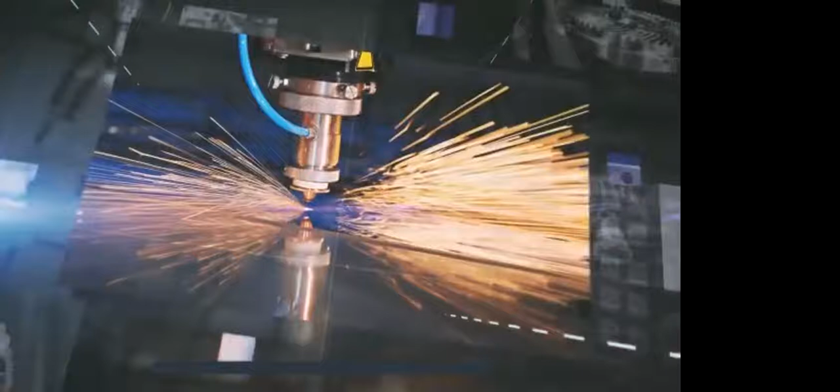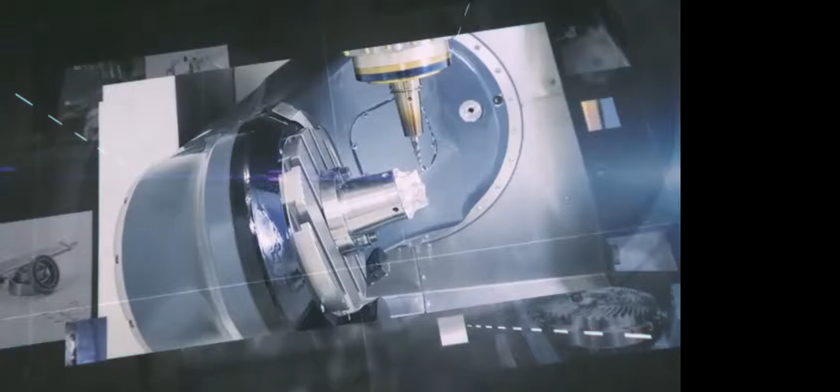...and innovation-led machine tool technologies. With over 500 member companies today, IMTMA members encompass over 90% of the organized machine tools and accessories business in India. IMTMA has been creating a vibrant, interactive space for shared innovations in the industry through support to its member companies, organizing mega events and flagship trade exhibitions at its advanced BIEC exhibition premises, and contributing to government regulations. IMTMA has also become a center of excellence for focused application-based training.

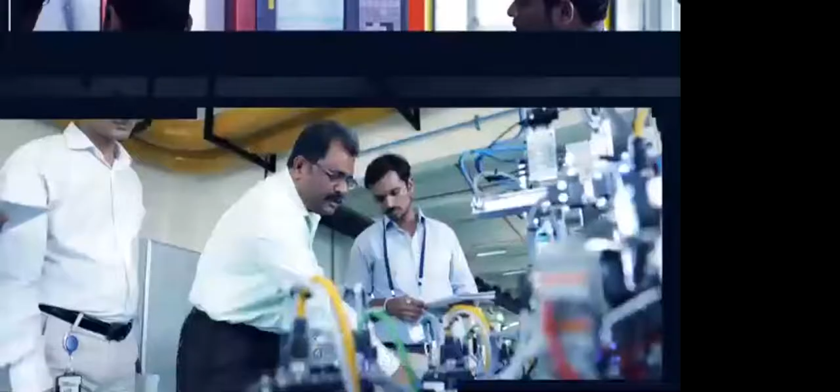Training and skill development at IMTMA. The IMTMA Training Advantage: IMTMA courses are differentiated by the comprehensive hands-on experience students receive on the latest machines currently in use in leading organizations across the world. The finishing school, the automation course, and the design course are supported by practical training on CNC machines and other equipment, giving students a direct edge over average theory-based engineering applicants. Engineering students gain confidence in their skills and prospective roles, and gain campus advantage to the powerful member organizations that are part of the IMTMA network.

Short-term workshops for industry professionals. We conduct many short-term programs at IMTMA for working professionals. We organize workshops on more than 80 technical topics covering various functions of manufacturing industries, including R&D, production, planning, quality, and maintenance. Each program is delivered by subject matter experts with more than 30 years of experience in their particular domains. Classroom sessions are supported by practicals, demonstrations, and industry visits in order to make the learning complete.

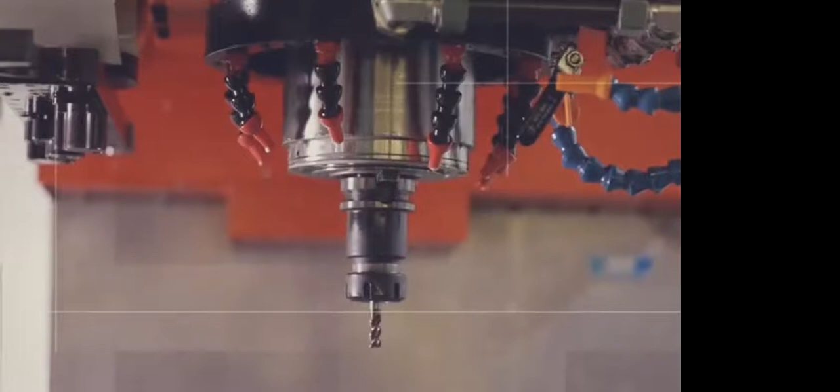Trade exhibitions at IMTMA. The IMTMA exhibitions and trade shows have been fertile ground for B2B and B2C business networking, providing the ideal showcase for members to demonstrate to the international machining industry. IMTMA has taken great strides in its vision for a unified, progressive machine tool industry in India, and continues to provide next-generation training and skill development to young engineering minds who will go on to reshape the Indian industrial landscape as we know it.

So participants, this was a short video which explained to you the IMTMA activities. Now I would invite Ramesh sir.

Yes, just a minute, let me share my website... let me share my PPT. Just a minute. Okay, just give me a moment, I'm setting it up. Maybe you'll have to just a minute... maybe you'll have to set it up yourself, Dhananjay. Just a minute. I think you'll have to set it up yourself, Dhananjay. Please bear with me, not able to... yeah, share. Fine, sir, yeah.

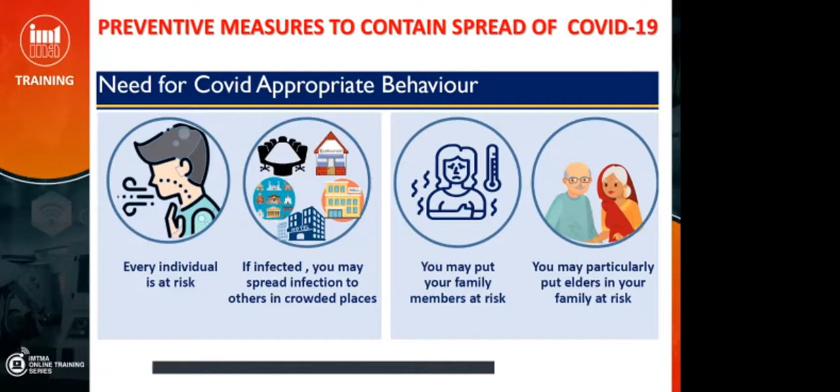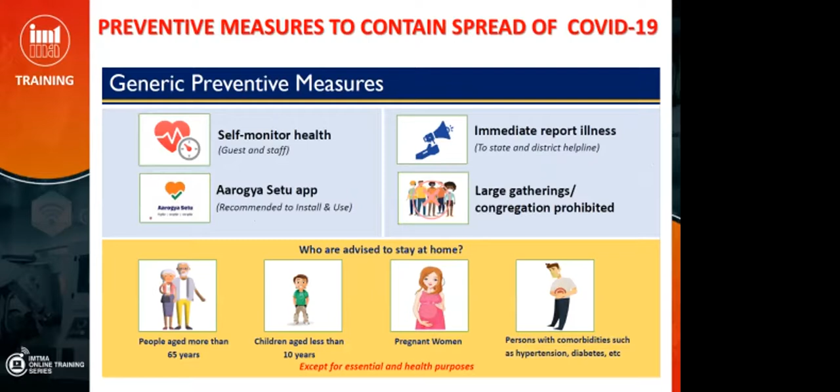We'll briefly explain to you about IMTMA. As you have seen in the video, IMTMA is mainly into training, exhibitions, and mega events. Imtex is one of our well-known brands; it is Asia's largest machine tool exhibition, held every year in Bangalore.

About IMTMA training, we offer 200 plus training programs. We have imparted training for more than 32,000 professionals from more than 4,500 companies, and man-days 126,000. These are snapshots of our technology centers from Bangalore and Pune, where we provide state-of-the-art technical inputs to machine tool builders and users. We have Industry 4 ready labs, and an automation lab with robots.

We conduct short-term programs and long-term programs. Short-term programs are mainly for professionals, and long-term programs are for practicing engineers and fresh engineers. These are career-oriented programs. Another vertical we have is e-learning, which I will explain in further slides. Our classroom training is a blend of theory and hands-on training, and wherever necessary, we organize industry visits.

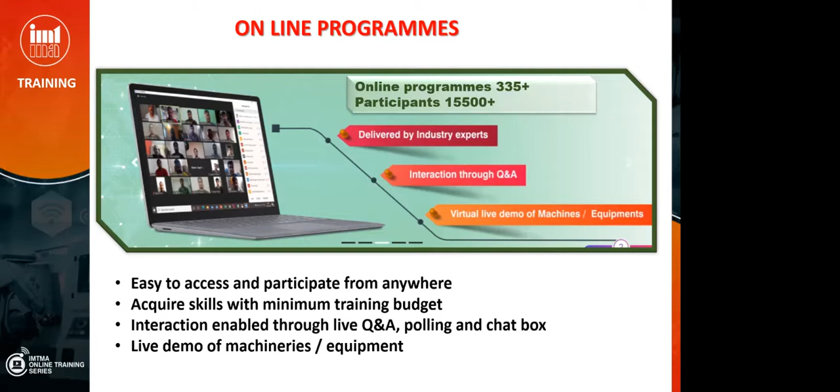About the online training programs, we have conducted more than 300 online training programs, and more than 15,000 people have participated. These are quite budget-friendly training programs, enabled with question and answers, pollings, and a chat box to make them more interactive.

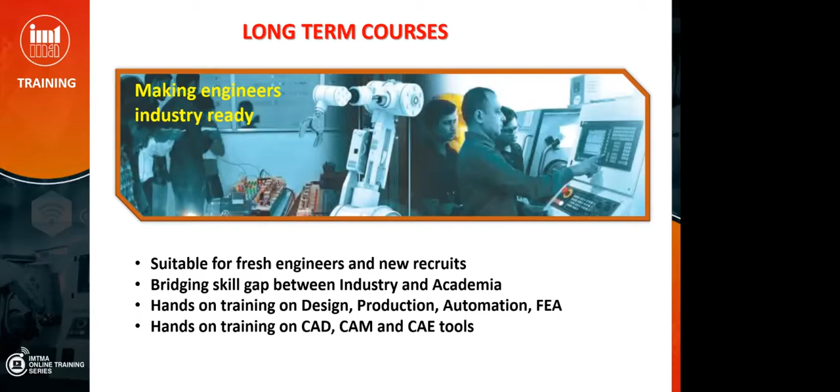Long-term training programs, as I said, are mainly for fresh engineers and practicing engineers; these are career-oriented programs. Our main websites are imtmaelearn.in and imtmatraining.com. On both these websites, you can explore training programs of your interest, and if you want to know more about IMTMA, you can visit imtma.in. So this was all about IMTMA. I'll stop sharing now.

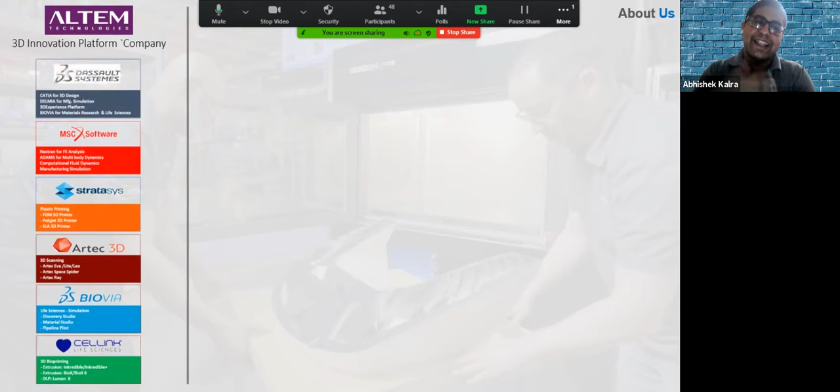Before we go further, a little bit about ourselves. Altem Technologies started in 2011, and we are in the 10th year of our operation. Essentially we call ourselves a 3D innovation platform solutions provider. That means we want to and are capable of addressing every problem of any company or organization trying to create a successful product which will eventually be manufactured. We enable companies to go from idea to reality, from art to part, as I like to call it.

In that pursuit, we have partnered with some of the top global solution providers in the world, starting from Dassault Systemes, which most of you know for their CAD platforms, the most popular being Catia. We also have simulation and analysis solutions. Once a product is designed, before you get into manufacturing, you need to make sure it runs under all possible conditions the part will be susceptible to. For example, a car has to run on smooth roads, dirty roads, off roads, in day and night, under normal and heavy weather, and so forth. So simulation and analysis solutions help you predict the behavior of your component under various conditions.

Then we come to the heart of our business solution, which is rapid prototyping and 3D digitization. Most of today's presentation will be based on that. We also have solutions in life sciences, with the same story of idea to product for life sciencing and drug discovery, but that's a topic for another day.

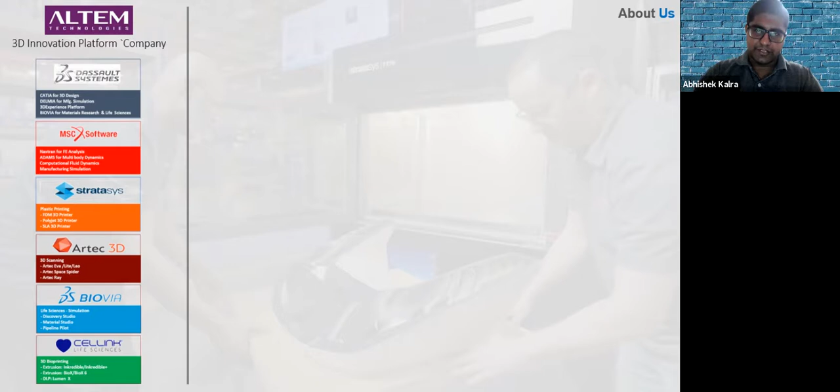As we said, we started in 2011, and today, after 10 years, we have been conferred with a lot of different awards, starting with being in the top 100 MSME companies of India. We've been awarded the most innovative 3D printing company of India by Frost and Sullivan, and we have one of the largest and happiest install bases among all Stratasys partners across the world. That's something we are very proud of, that our customers are very happy with our support. We have more than 400 customers in different areas, ranging from automotive to aerospace, consumer products, healthcare companies, packaging companies, and so on and so forth.

The good thing about 3D printing is that it is a solution that impacts everybody and anybody, whether you are a plastic bottle manufacturer, a four-wheeler manufacturer, a two-wheeler manufacturer, or Airbus that makes planes, or ISRO that makes satellites. It impacts everybody because it's becoming more and more critical for everyone to improve their products and reduce the time and cost in which these products are made.

Now let's look at some of the issues that manufacturing driven industries face. I'm assuming that most of you are from the manufacturing industry, so this will be highly relatable to you.

First thing is customer expectations have become very, very high. We are customers ourselves, and we want the best products, not just functionally, but also aesthetically. When you go buy a car, you look at the function, how big is the engine, what is the mileage, all of that. But you are also equally interested in the appeal of the car.

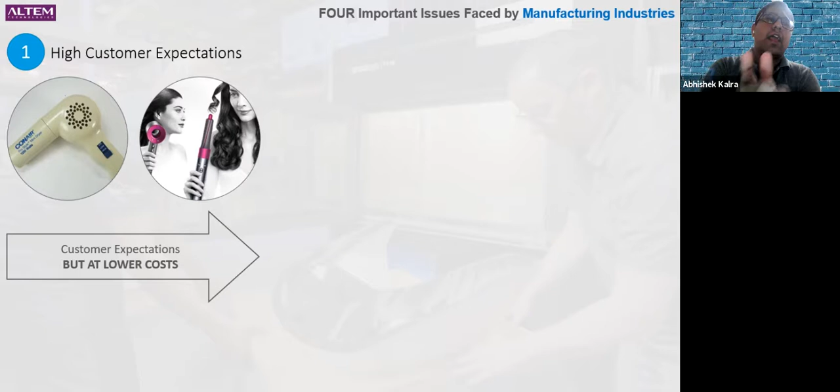Nobody wants to buy a Fiat today. People want to buy a Mercedes today. If I say that a Fiat car, let's not go to Mercedes, but let's say a Maruti Baleno, have the same functional performance, you will never still go and buy a Fiat. You'll still go and buy a Maruti Baleno. Even if the functional performance of the Fiat is a little bit higher, you'll still go ahead and buy a Baleno, even if it's a little higher in price.

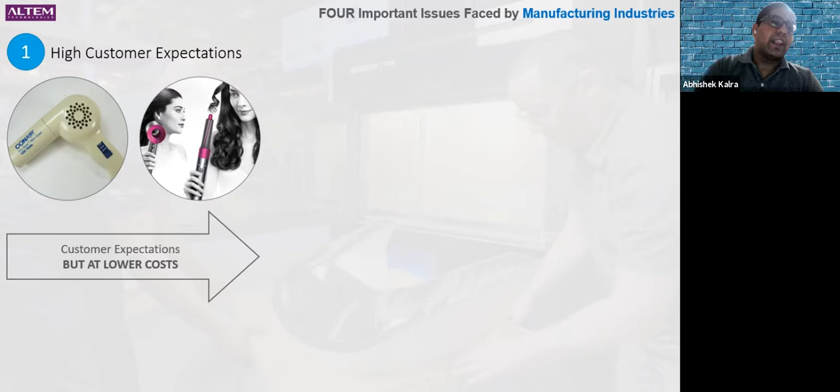But while customers want better products, they simultaneously want them at a lower cost. And competition will always be able to deliver products at a lower cost unless you are the fastest, most efficient, and the cheapest. This is perhaps an image that all of you would have seen.

This is an example from the smartphone industry, but it's applicable to anybody and everybody, whether it be consumer electronics, automotive, or special purpose machinery. Competition is so tight that the average time companies have to launch their product is reducing drastically. 3, 4, 5, 7 years ago, it used to take a car company easily 1.5 to 2 years to launch a new model.

Now we have come into a scenario, and even the pandemic has not slowed it down, where automotive companies are launching 2, 3, 4 products every year. And then immediately another car company will launch another product. So in order to be able to sell more, your product has to be the best product available in the market at the best cost that is the worth of that product.

And it has to be most exciting for the customer. The third problem is cost pressure. People want better products, you have a larger competition to deal with, people want better products at a lower cost. You have to innovate faster, but there's always a consistent cost pressure that I need to do all of my development at the lowest possible cost.

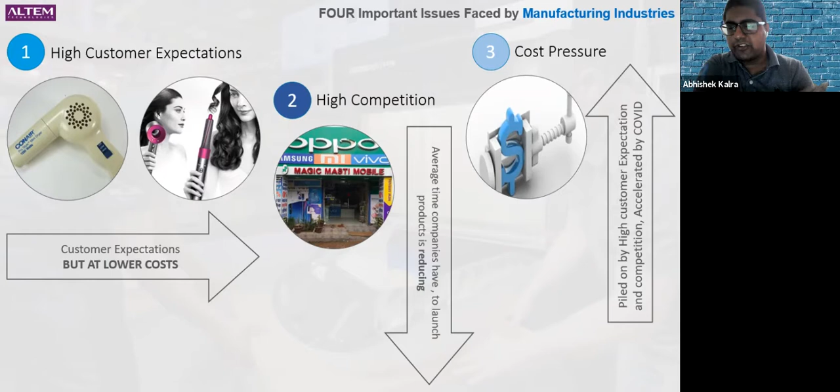Then confidentiality becomes a very important thing here. There are several companies, General Motors, to give one example, who've had to almost scrap the entire product because of data breaches. Now, because you are faced with such high competition and cost pressure, what we tend to do is not invest in technologies in-house and start to outsource work.

Some places it works, I'm not saying outsourcing is bad, but often that outsourcing is driven by a risk of your data and your project going to the same vendor as your competition's vendor. I have an interesting anecdote to share with you from a few days back.

One of my customers required a very, very large part for a new automotive product development, and they outsourced it to a services company, not based in India, at least I can say that proudly. Of course, all NDAs were signed and all confidentiality agreements were in place. But then 2 days later, the image of that product, a styling component for a four-wheeler car, was being published on LinkedIn.

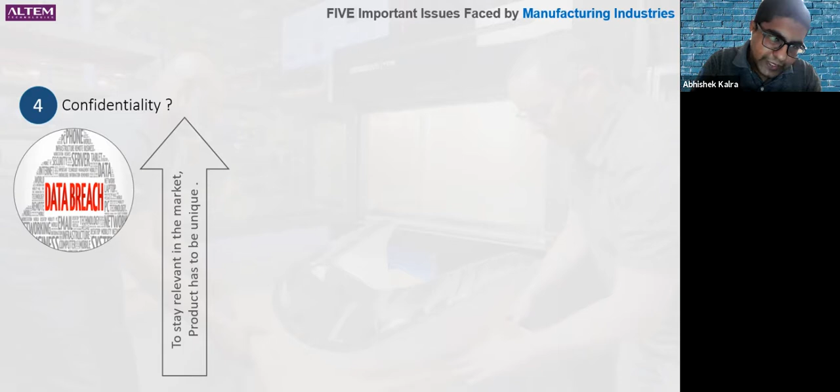And so despite non-disclosures, data does get leaked, and it's very relevant, very important that your product is unique. So if confidentiality is not guaranteed and your data is getting leaked left, right, and center, there is no way that you can be unique.

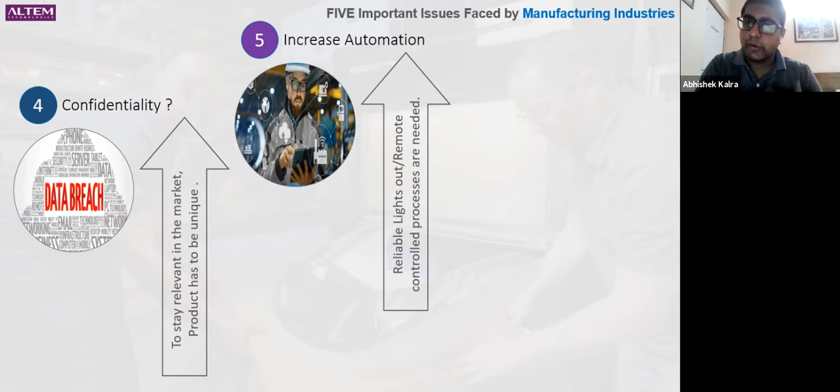The fifth problem, or window of opportunity, is that we need to increase automation—reliable lights-out, if not completely lights-out, at least remote-controlled manufacturing processes. COVID has taught us a big lesson: anytime anything could happen, people could fall sick, factories would need to be shut down, labor needs to be removed, governments could put lockdowns, but manufacturing still needs to be done. I think we are far away from complete automation, but tools like 3D printing and other Industry 4.0 tools, which even Ramesh and Dhananjay were mentioning in their presentation, are really important for every manufacturing-driven organization to adopt if we want to consolidate and create the best product at the best price.

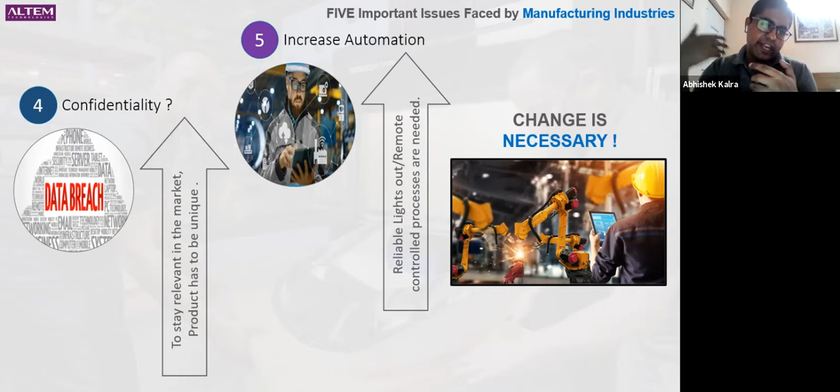The most important thing is change is necessary. It's no longer an option, no longer a luxury—it is necessary. We need to evolve. Manufacturing industries are under constant pressure to improve and change to create the best possible product. These criticalities lead to a force that requires you to invest in advanced technologies, which might cost you some money to start with, but will definitely give you the solution to all of these problems, if not in the short run, at least in the medium to long run.

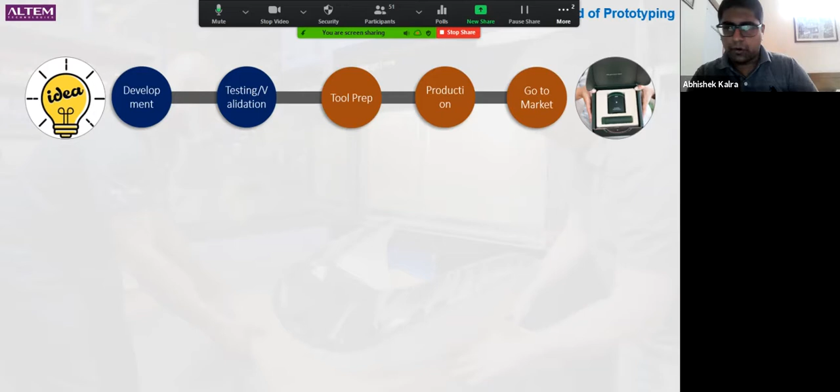Let's look at how that's going to happen. Now, all of you, I'm assuming, are product development people. For those of you on the call who are not, this is how product development works. Let's say I want to create a bottle of perfume, or an air conditioner. It starts with an idea. Then you get into development, where you design the product and design the systems that go around the product.

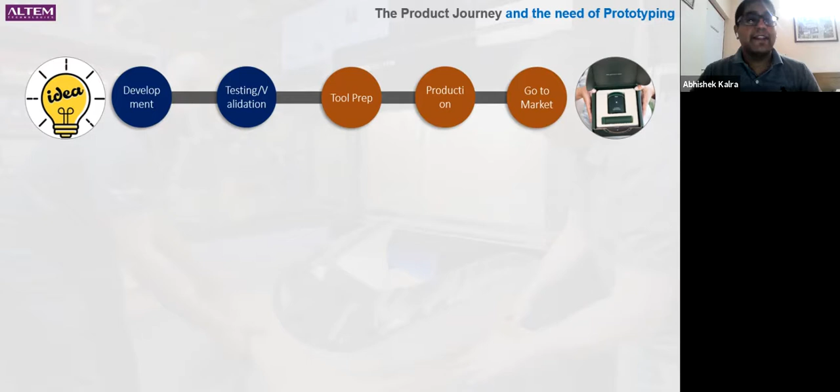Let me give you a very simple example. I have this plastic bottle in my hand. It has two components, the bottle itself and the cap. My development stage would be where I design the bottle in a three-dimensional drawing software, and then choose the material, choose the color, those kind of things. And then I need to test and validate my design, which typically happens with either prototyping solutions or simulation solutions.

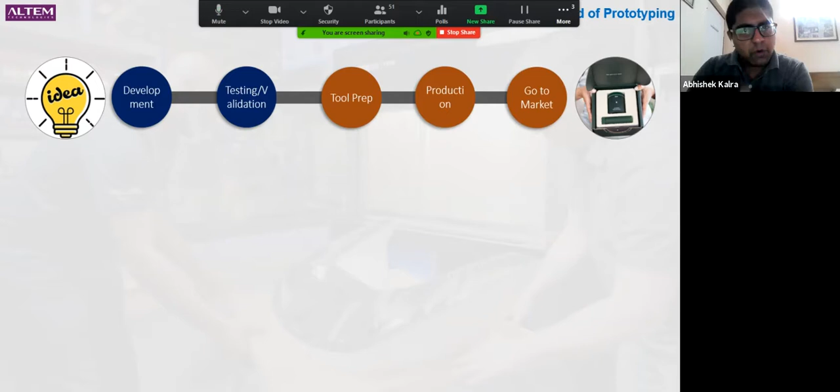Once you've crossed this path and stepped forward towards manufacturing, your fate is sealed. The moment tool preparation and pre-production starts—and you guys are machining people, so none of you are better judges of this—there aren't really any major changes you can make to the concept of the product itself. You can, but then you'll have to go back and waste time and waste money.

Now here is where you have scope for product improvement. This is the place where you can improve your product until you get the best possible version. But the challenge is that if we keep doing iterations, and if the cost and lead time of iterations is so high, then somewhere we have to put our foot down and say no, this is the best I can do, and leave the rest to my best sense of judgment, or to fate. Of course, you also have scope for improvement from a per product cost reduction point in the manufacturing cycle as well, but that does not improve the quality of your product.

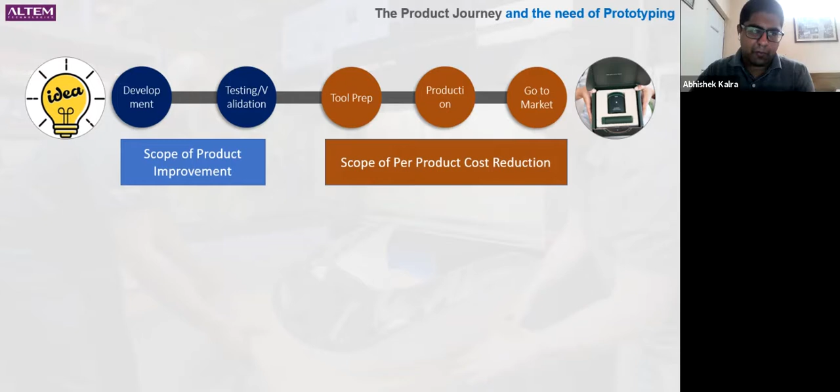So when I say scope of product improvement, I have one simple funda: fail fast, succeed fast. You fail fast, only then can you succeed fast. So if on the second day of coming up with an idea, I know there are errors—for example, the cap doesn't fit the bottle properly—I can immediately correct it and move faster towards my production and tool preparation. The second version of fail fast, succeed fast is to achieve the best possible version of your product.

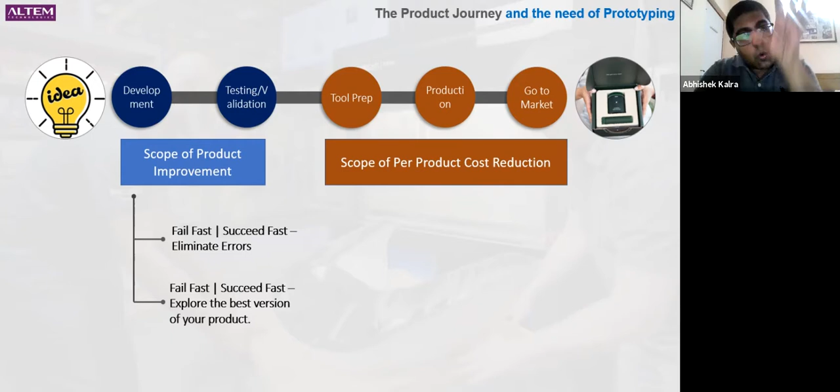But this is only possible—doing all the possible iterations and exploring all possible creativities—when there is a fast and cheap method to develop, test, and validate your product.

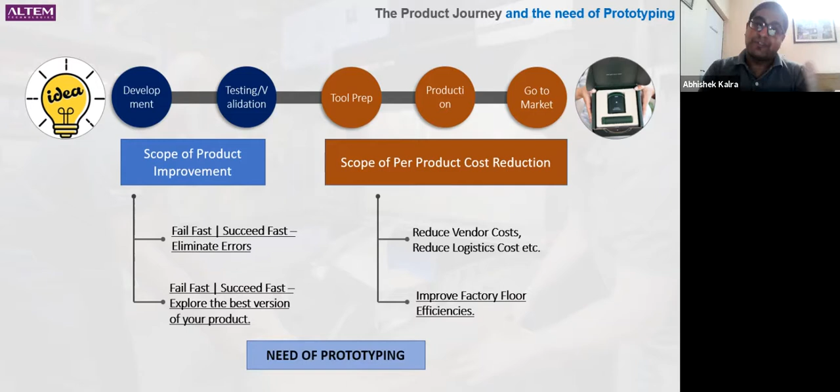And then, of course, with respect to manufacturing, you have to reduce vendor costs, reduce logistics costs, set up rate contracts, so on and so forth. But you also need to improve factory floor efficiencies. How fast are products rolling out of my factory? How efficient is my labor? These three places are places where 3D printing and prototyping can fit perfectly and give you incrementally faster results.

Let's look at how. Now, 3D printing is not new. It has been around for at least the past 35 years. Today, I don't think there is anybody in the country, or in the world, who is not using 3D printing in one way or the other. Whether you are a small bottle and cap manufacturer or an airplane manufacturer, everybody is using some sort of 3D printing in some way, whether they have in-house machines or they outsource it to vendors, or at least if they don't do 3D printing, they would do some sort of rapid prototyping with machining and soft tooling, etc., which are somehow also linked to the same idea that I'm trying to present.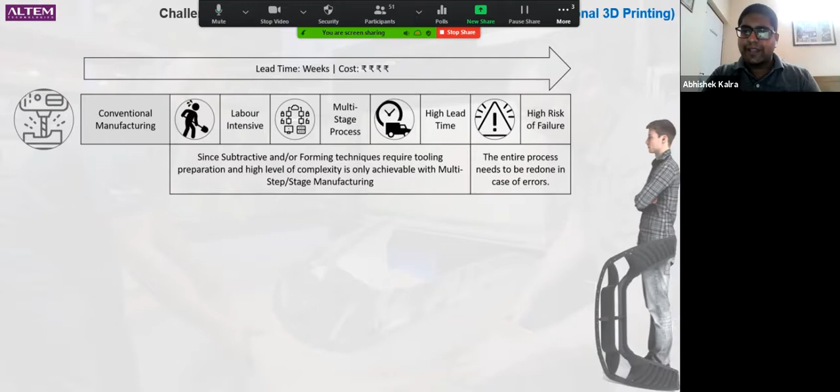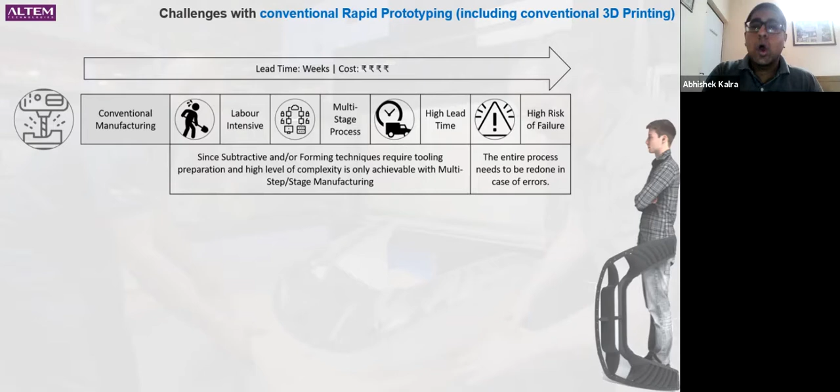Now, the traditional way of prototyping is conventional manufacturing, a combination of machining and tooling. I don't need to tell you how complex it is to create especially complex prototypes like the one you see on the screen with machining and molding. It's labor intensive, it's a multi-stage process. You might require multiple machining cycles, multiple tools. That obviously gets associated with high lead time. Costs are very high, lead time can go into weeks. And if something goes wrong, even if your design is out by a millimeter, either you throw money to repair your tool or you throw money to start all over. Long story short, you spend a lot of time, you spend a lot of money.

This kind of gets solved with 3D printing, but the challenge is that traditionally 3D printing has been very unaffordable. Well, of course, you have smaller printers which cost as low as 5 lakh rupees, 6 lakh rupees, some even cheaper, but they are very low quality, so we're not going to talk about those. But if you talk about big parts, larger parts, complete fenders of cars, complete panels of washing machines, complete cooktops of gas stoves, white goods, HVACs, so on and so forth, for every company to be able to invest in such large format 3D printers is impossible, because traditionally that type of machine has gone into crores and crores of cost.

So what people do is they tend to go outsourcing. There are some very good service bureaus set up in the country. We are obviously one of them, where you give your design and they give you your part back, and they typically take a week to 10 days depending upon how big the part is.

Now there are several challenges. Again, you need to be cost competitive. So what's going to happen is that your engineers or your product heads are going to call 4 or 5 vendors, send the files to 4 or 5 different people. If you have non-confidentiality with those 4 or 5 people, good enough. If not, then you have to sign confidentiality agreements. It's a very tedious process. Then there is no control. If my machine as a service bureau fails, then your product development as an end customer has stopped, and there's nothing that you can do about it. Of course, the lead time is higher, and most importantly, confidentiality is at risk.

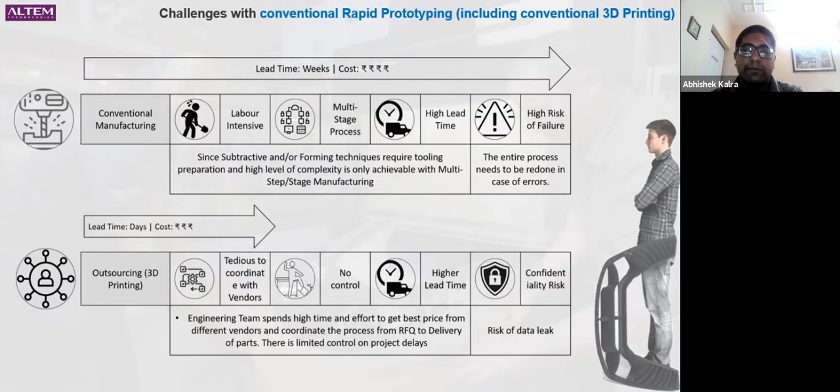I told you, one of my customers got a part done from a fairly popular, in fact globally listed, service bureau under a confidentiality agreement, and they shared their part image on LinkedIn the next day. This is very simple. I have seen scenarios where I have seen images of other customers' parts on service bureaus' websites, and it could be an honest mistake, but it does happen. And in fact, even then, because those service bureaus have to amortize the cost of the heavy equipment that they have bought, they'll charge you at least 2x to 3x of time. So your lead time is still high, lower than conventional manufacturing of course, because 3D printing is faster and cheaper, but because you're paying for somebody else's time and somebody else's money, you still end up paying 2 to 3 times what it would cost idealistically.

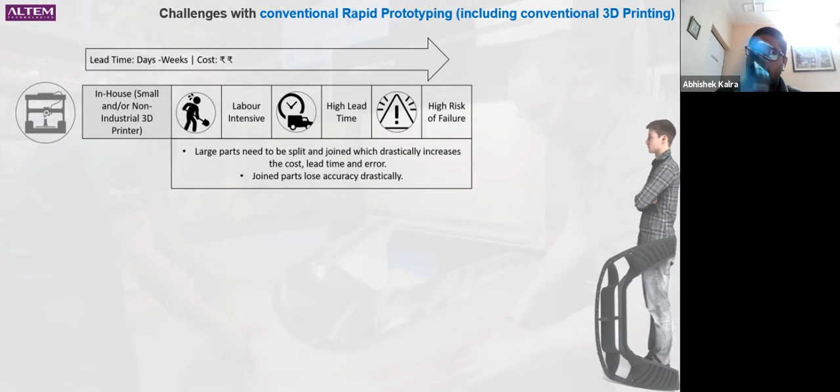The next thing which people do, which I would call a brutal mistake, is to try and use non-reliable in-house 3D printing. Now, 3D printing is such a heavily talked about topic that people feel a 5 lakh rupee 3D printer and a 1 crore rupee 3D printer and a 10 lakh rupee 3D printer are the same. And what happens is that people buy machines without properly evaluating what their requirements are. I have seen customers who produce 3 meter parts buy a 300 by 300 mm machine, and they're splitting the part and joining it together.

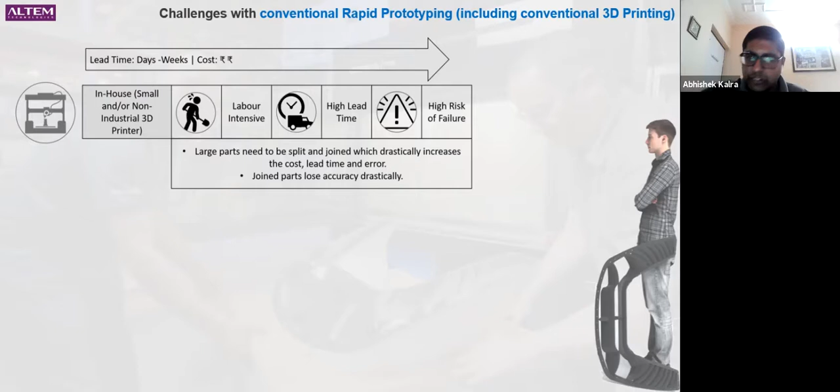Parts fail, there are reliability issues. When you assemble the whole thing together, the deviations of accuracies of 10 different parts that you're trying to join together have added up, and the overall assembly that you get after 2 or 3 weeks of hard effort is not usable because the part is inaccurate.

So this is a complete no-no. So what is the solution then? The solution is to have a large format industrial 3D printer, which gives you exceptional part quality. When I say part quality, I don't just mean a fancy looking surface finish, but 100% accurate geometry realization of whatever you'd like to feed into it, whether it be a simple cube or a complex air hood vent like this, or any geometry you can design.

Because when you design products, you don't design it according to 3D printing, you design it according to your final mass manufacturing method. So your prototype has to copy or mimic that. These systems are typically plug and play, laborless, generally reliable and error free. And even if you fail, you start a job today and it's a 30-hour job, at the end of 30 hours you know whether your idea or design is correct or not, and you can iterate faster. As I say, fail fast, succeed fast.

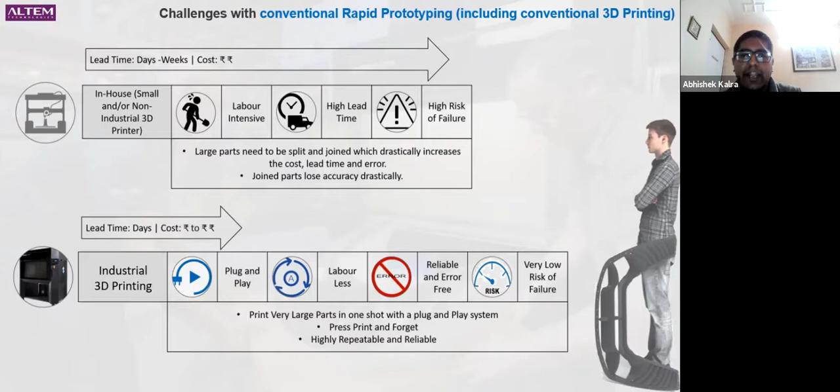But there's one problem. The challenge is cost. Conventionally, large 3D printers - and when I say large, I mean printers to the tune of 1 meter by 1 meter bed size, or half meter by half meter bed size - have been expensive.

There are cheaper systems available in the market, for crying out loud. The other day I got an email from somebody selling a 1 meter by 1 meter by 1 meter machine, claiming it to be industrial, for 5 lakh rupees. And I can guarantee you that you cannot even take out one single successful part from that 5 lakh rupee supposedly industrial machine.

So I'm not even going to talk about those - they're a sham. When I talk about proper, well-built industrial machines, whether from Stratasys, which I represent, or other companies, they get into crores. You have to pay very high capex. Operations are difficult because these are big industrial systems.

Now for cash-rich companies like the Boeings and Airbus of the world, and for governments like ISRO or HAL, this is okay - they can dedicate government funds to it. But for smaller companies, for companies with the cost pressure we spoke about earlier in the presentation, this is almost impossible. And then you get into the loop of compromise.

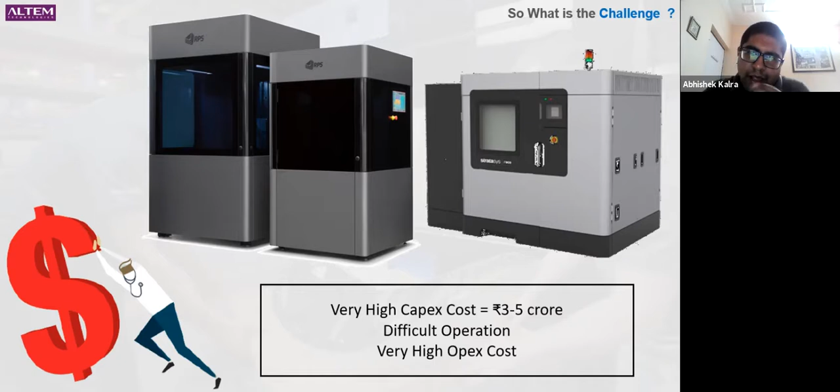So now, how do we solve this problem? This is the problem we as 3D printing vendors have been facing for the past 10 years - people want big parts, but the operating cost and capex cost is so high that people end up looking at alternatives, and things just fall apart. So how do we do it?

So we introduce to you a revolutionary product, based on the same industrial 3D printers we've been developing and selling for 30 years, at a much lower price point. I'm going to play a video - if somebody can just put it on the chat, let me know if you can hear the sound or not.

So are you able to hear the audio? Yeah, audible, sir.

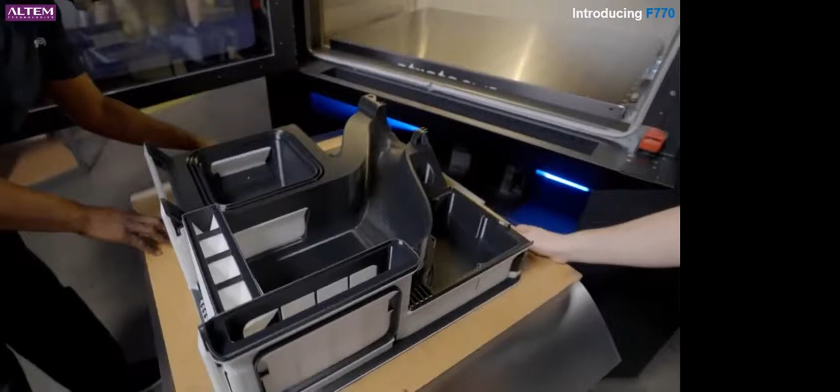The video gives you a bit of a hint on what is the scale of things I'm talking about. Long story short, we have developed an industrial 3D printer on the same DNA as our larger previous generation industrial 3D printers, but you get it at a price that does not break the bank.

Now, is it as cheap as a 5 lakh or 10 lakh rupee machine? No, it's still higher at cost. But if you're a company that does a lot of large size parts, and I'm sure you're currently struggling with a large cost of outsourcing or a large lead time of outsourcing, then this machine is for you.

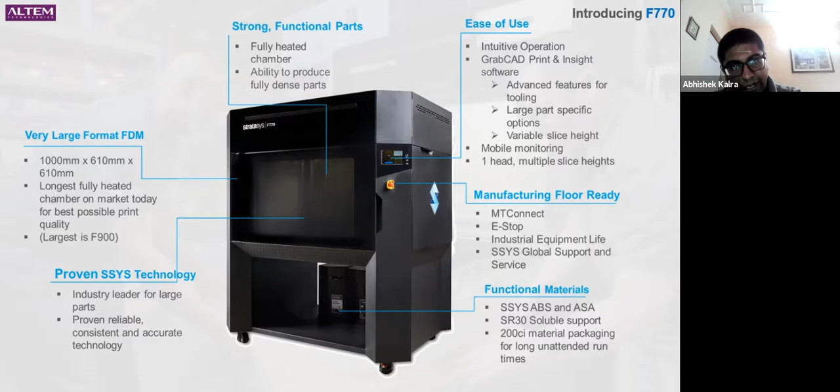Very rarely will you have a need to actually split your parts, which is where the trouble starts. As you saw in the video, you can produce very complex geometries: parts with internal channels, parts that are overall very large but have very thin features, parts where you require 100 micron or 50 micron accuracy over a 700 or 800 mm part, at a much faster lead time and significantly lower cost than any other equivalent quality alternative available.

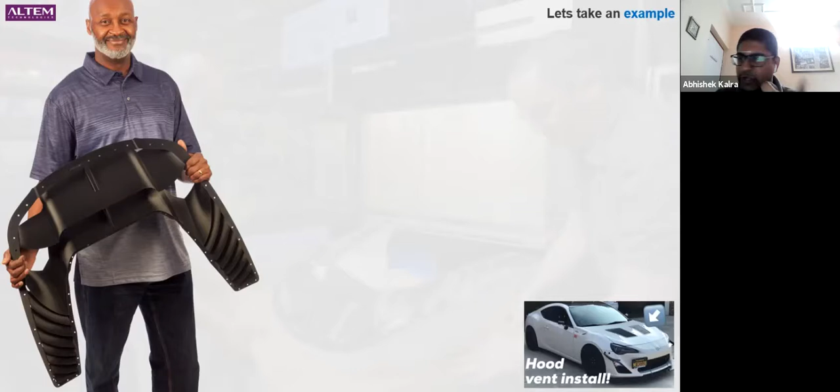Let's take an example. This part you see in the gentleman's hand is a hood vent for a vehicle. It gets installed from beneath the car, just under the hood or bonnet, and the fins come out, acting as an air release mechanism. So this is not just a form and fit prototype, but a part that will be susceptible to a lot of endurance testing and thermal loads because the engine releases heat.

It's a 783 mm part, almost 800 mm, but with very thin and complex curvatures. The fins that control the aerodynamics are less than 5 mm. All of this has to be produced at sub-100 micron accuracy while being susceptible to thermal loads.

We ran an analysis locally in India: if you have an in-house machine, it costs about 4 days and about 80,000 rupees. And that 80,000 rupees isn't just material cost - it's everything: labor, spare parts, accessories, power, internal time cost, all put together.

If we outsource to a service bureau, irrespective of technology, you'll have at least double the time and double the cost. Why? Because service bureaus, even if they can do the part at that price, charge you more since they have to amortize their machine - there's nothing wrong with that. And because such large sizes aren't possible with every technology, and people may not have multiple machines running, they often have to split your part and join them together.

If it's a simple form-fit part, splitting it into 2-3 sections may not matter, but this is a performance functional prototype - if you split the part, it's likely not going to be usable. In fact, when I was preparing this data, a lot of service bureaus refused to even quote for this part because it was too big and too complex for them to even try.

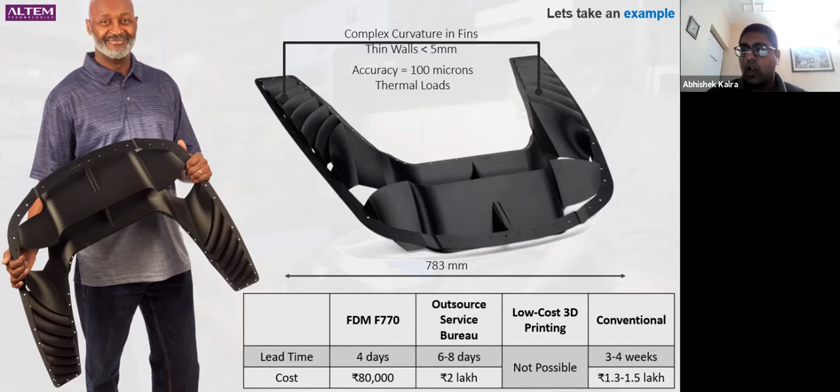If you need 3 or 4 iterations of this part and go any other route, you're delaying your product by at least a month. Remember, there's not just one prototype required for any product, whether a washing machine or an airplane - you need multiple parts, multiple prototypes. So every day and every rupee saved on product development by adopting in-house 3D printing adds up to much bigger savings and much faster product development.

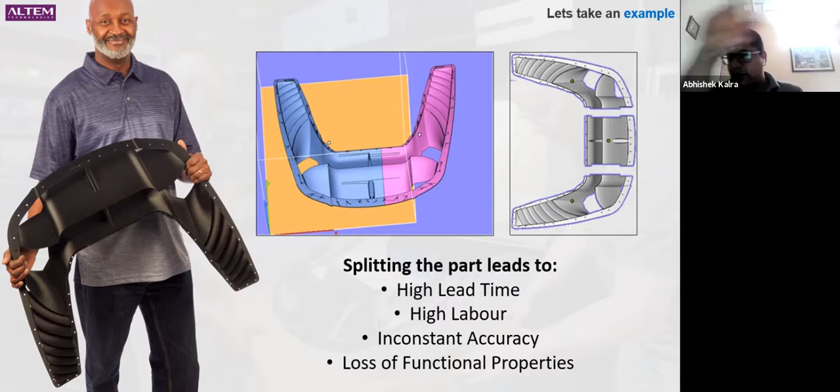This is what it would look like if any other conventional 3D printing technology had to do it - they'll have to split it into 3 parts, and then we're back to where we started: we won't get consistently accurate parts.

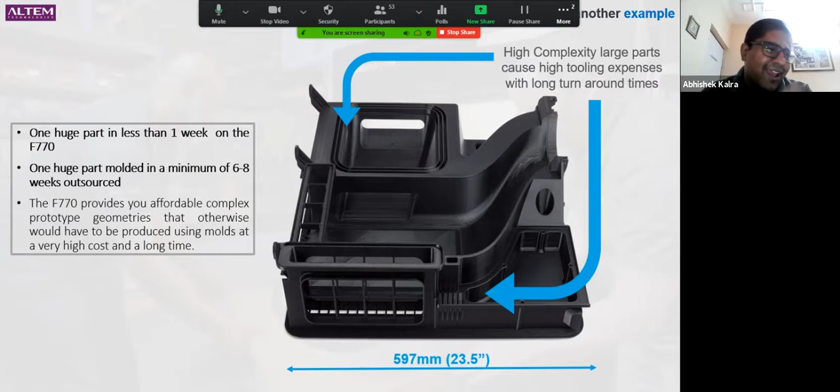You'll probably have to injection mold it or at least soft mold it, and that's going to take weeks. But with an in-house 3D printing setup, this is 4 or 5 days of printing, with similar cost dynamics. Despite being overall a larger part, it has very precise and fine features - 3.5 mm wall thickness, internal features, and ribs and clips hanging up.

Long story short, the fastest way to print, the fastest way to create this part is with 3D printing, and the fastest and cheapest way to 3D print this part is with in-house 3D printing. Another major benefit specific to fused deposition modeling 3D printing on this machine is that you can build parts that are hollow from inside, so you can save a lot of material if these are non-functional prototypes.

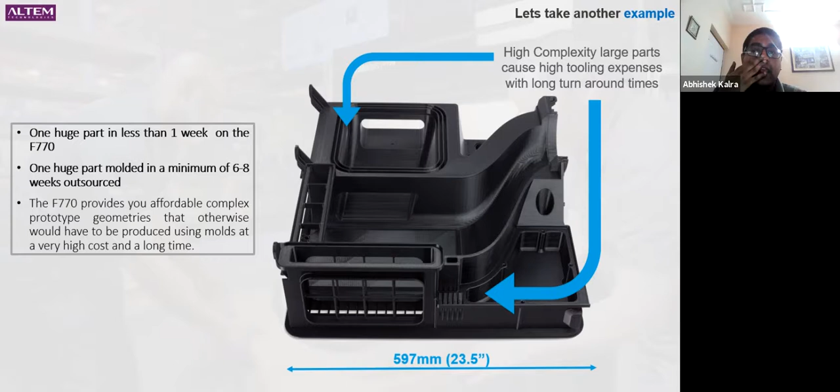Large parts could be everywhere, air conditioners, coolers, washing machines, kitchen equipment, suitcases, lawnmowers, bicycles, automotive fenders, doors. You imagine it, it's all around us. If you have a monitor, look at that. If you have a TV, look at that. If you have a washing machine, look at that. If you have big parts, 3D printing is the solution. If you have small parts, 3D printing is still the solution for you. But if you have big parts and do multiple projects a year, this is the solution for you.

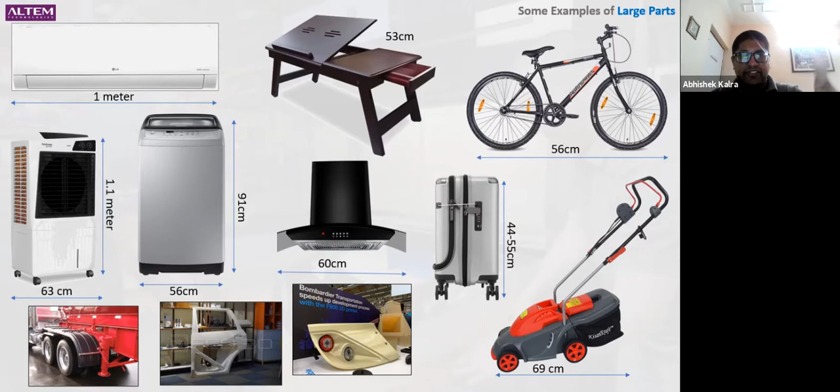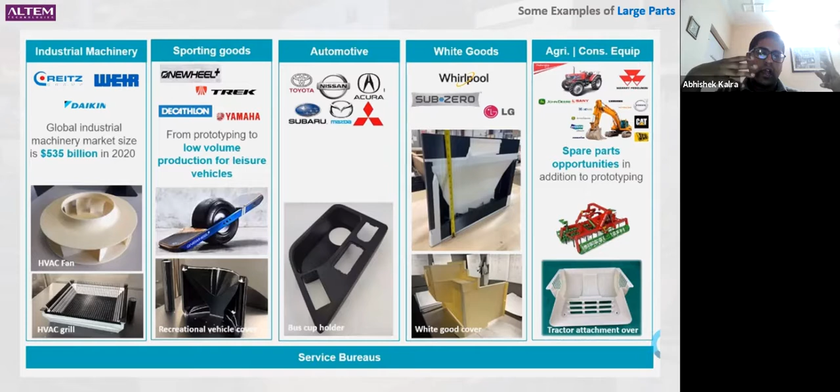Some companies and industries using our parts include industrial machinery and equipment, HVAC companies such as Weir and Daikin, sporting equipment such as Decathlon and Yamaha, automotive companies like Nissan, Toyota, and in India, Ashok Leyland, Maruti, white goods companies like Whirlpool, LG, Bajaj Electrical, Sub-Zero in India, and agricultural equipment companies like Caterpillar, John Deere. All of these companies are using this kind of 3D printing technology to significantly reduce product development lead time.

I'm going to show you one video, and then I'm going to show you a couple of Indian examples, and then we can move into some questions and answers.

Sub-Zero Group is a manufacturer of luxury appliances, Sub-Zero being the refrigeration appliance, Wolf being our cooking appliance, and Cove being our new dishwasher line.

The corporate development lab is basically a mini factory, a factory within a factory. We have seven 3D printers. I really enjoy 3D printing, it's my one love in our lab. I can still turn the light on in that compartment and watch those things run and think, man, it's amazing what these things do, and they are really important to us.

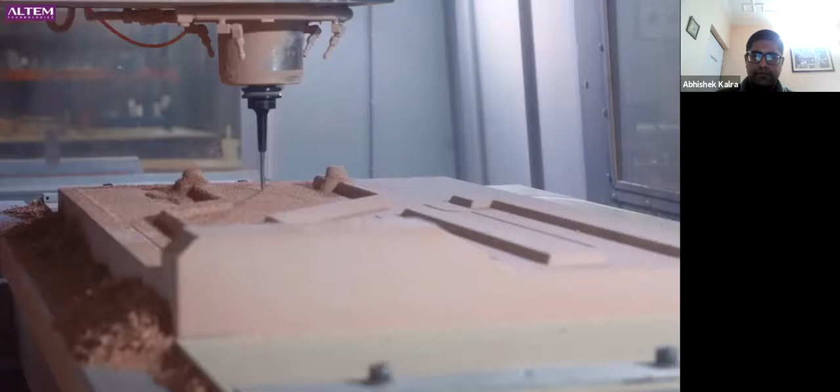If you open up a refrigerator, for instance, we make those parts within our lab. Basically, we try to duplicate as many of the technologies and applications that we have on our production floors right within our lab.

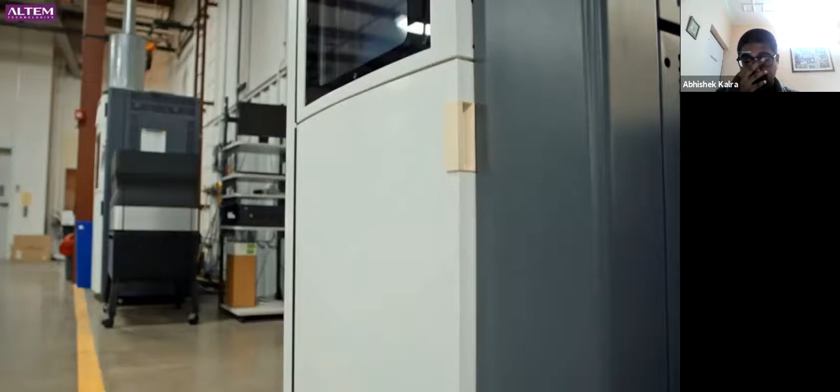I was excited about the F770 because of the build size. What we're starting to see is a lot of parts that are just starting to fall outside the build envelope of my Fortus 400s, and because of that my Fortus 900 gets overloaded, and we end up sending some of our bigger parts out to service bureaus. So when I heard about the build size of the F770 and the price point being talked about, I thought this could be a really nice addition to our lab. The size, 39 by 24 by 24, fits us very well.

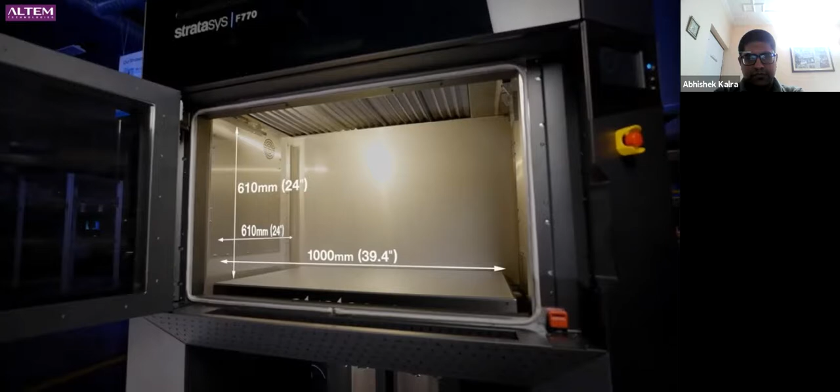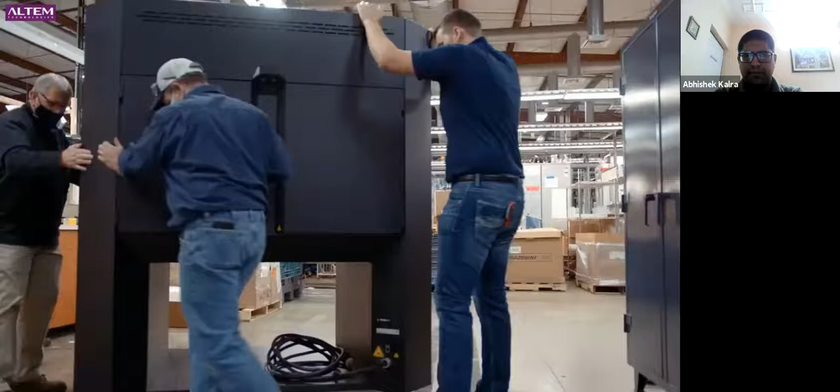Big is always good. You can make small parts in a big machine, but you cannot make big parts in a small machine. The biggest thing with having the 770 in the lab is that we're going to be able to keep bigger parts in-house, so it's going to eliminate a little bit more outsourcing. Probably 30 to 40% in savings for us to keep it in-house, which is huge.

When you've got product builds coming basically every six weeks, six weeks seems like a long time, but it's not when you've got a large number of component parts that you have to generate, and you've got to make sure everything is on site and ready to go when that start date is. So we can't miss a beat.

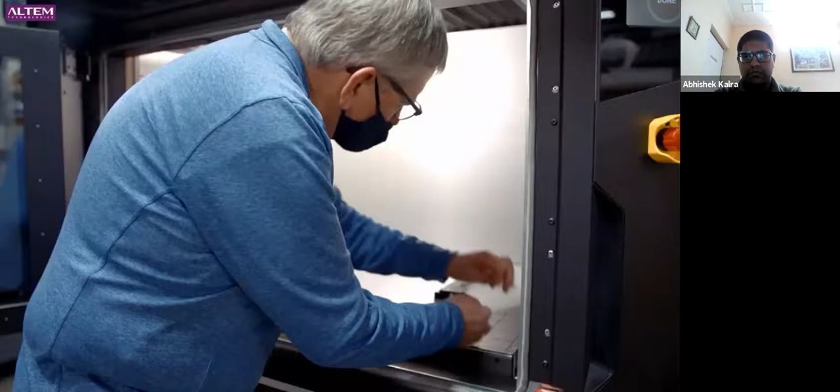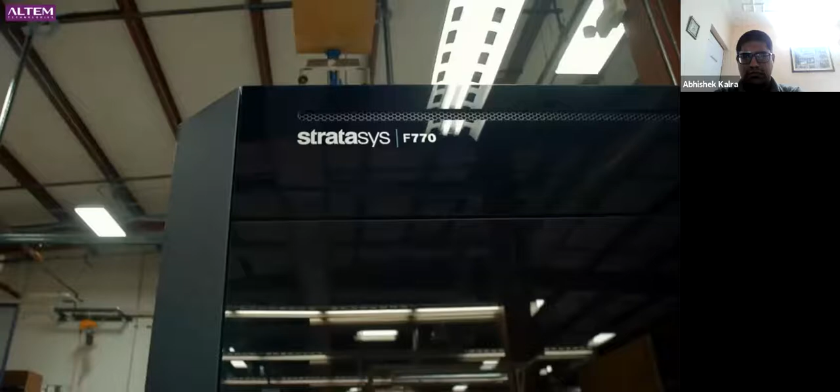Knowing the reliability that Stratasys has shown us over the 20 years we've been printing with them, I have nothing but confidence that this F770 is going to perform equally as well. We have not seen any major downtime in any of the printers that we've had. They've been supported extremely well, they're made extremely well. I just look at that Fortus 900 we have, and that thing's solid, a rock solid machine.

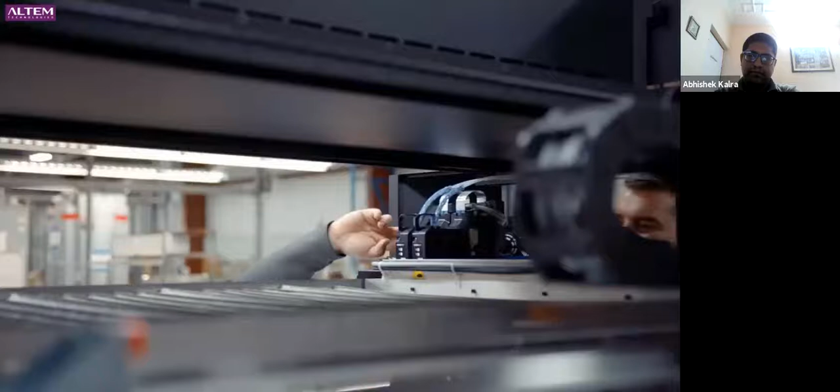And we run them hard, those machines never shut off. We're in there Saturdays and Sundays changing them over because we need the machine time, we need the throughput. I really don't know where we'd be without them. I did get a couple of requests this morning for some bigger parts, and I thought, okay perfect, those are going on that machine this afternoon.

This video shows how a kitchen equipment manufacturer, and we have similar customers in India as well, is using multiple 3D printers and decided to invest in one more because it was the right product at the right price. Another thing I'd like to emphasize is the life of a machine. When you buy a system, you want to use it for a very long period of time, and these machines, as you can probably tell from their construction, will last at least 7 to 10 years.

So you don't have to amortize your investment in 1, 2, or 3 years. You have 7 to 8 years to do this, but most of our customers have managed to get an ROI out of the machine within the first year or two. And one such customer is Ashok Leyland. This company needs no introduction.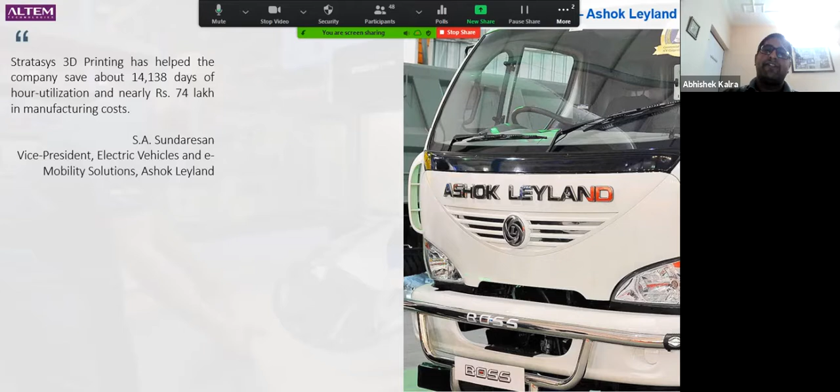They are one of the world's largest commercial vehicle, bus and truck manufacturers, and of course India's largest. And they claim, as of December 2019 before the mayhem took over the world, that they have saved nearly 74 lakh rupees in manufacturing costs and about 14,000 days of man-hour utilization in the 2.5 to 3 years they have had a fused deposition modeling system.

They do everything from mechanism prototypes to complete big cabin interiors, to clutch housing development. All in all, they print close to 50 to 80 projects a year, each between 1 and 5 parts. So long story short, the machine runs 24/7. Some of these machines, even during the lockdown, because they can be remotely controlled and operated, there are cameras inside the machines, and you can control them from anywhere in the world. Even during the lockdowns, we were running these machines.

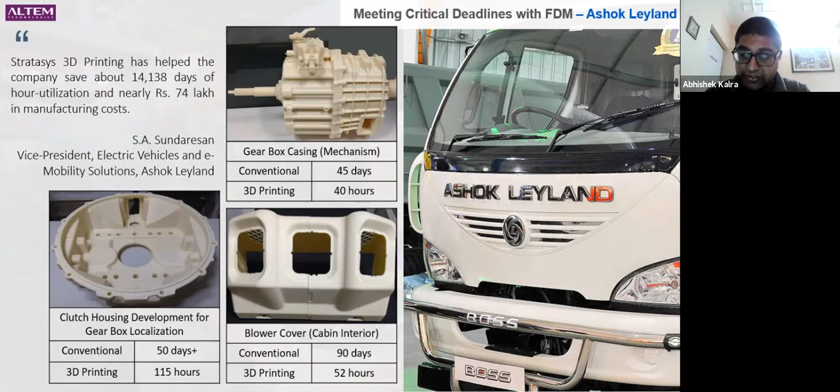You can see the exuberant amount of savings the customers have experienced. So weeks of work is now hours of work. Remember, when I say 40 hours of printing, it doesn't mean an operator has to stand there and work the machine for 40 hours. You just press play and walk away. Then once you come back, you just remove the part from the build platform, do some basic post-processing, and it's ready to use. Remember, I told you there are also ways to improve factory floor efficiencies, which can in turn reduce cost pressure from the overall product.

One such example is from Honda Cars in India, where they have built large jigs and fixtures, dimension verification jigs, mounting jigs for the front hood, rear view mirror, side view mirror, rear windshield, front windshield, top glass. These fixtures are running on the line for now 3 years plus. The entire Honda Amaze line does not have a single metal fixture on the line. The entire metal fixtures have been replaced with polymer 3D printed fixtures built out of machines just like this.

The parts are much, much lighter. They're much cheaper to manufacture. They're much faster to manufacture. And most importantly, if a part is lighter, a 30 kg fixture is now reduced to a 7 kg fixture, your factory floor moves faster, your labor efficiencies increase, and so on and so forth.

So now I'm going to run you through some numbers and show you what I've been saying throughout the presentation, that you can build faster parts and cheaper parts. Let's see some more numbers. So I took some sample geometries and did some analysis on them.

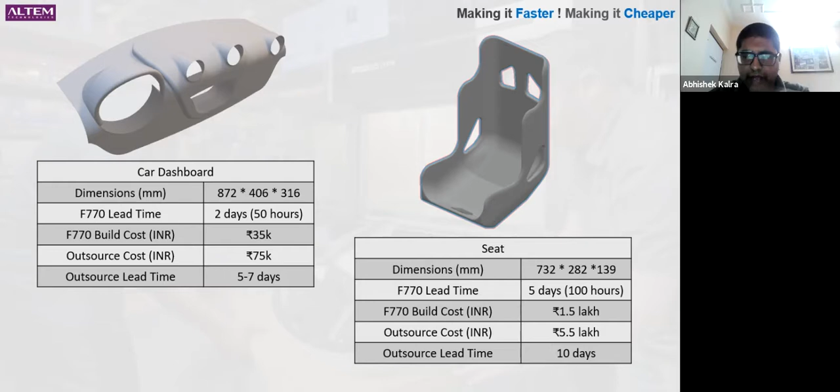35,000 and 75,000, 2 days and 7 days. And then I come to the most interesting part I saw, which is a very big, large seat - essentially like a baby seat. As you know, there are regulations which say that if you have a baby in the vehicle, you need to have a seat strapped onto the car. It takes 100 hours and about 1.5 lakh rupees to build this part in house. The service bureau asked me for about 5.5 lakh rupees of cost. So that's the amount of saving you can do, both with respect to time and cost, by implementing in-house 3D printing.

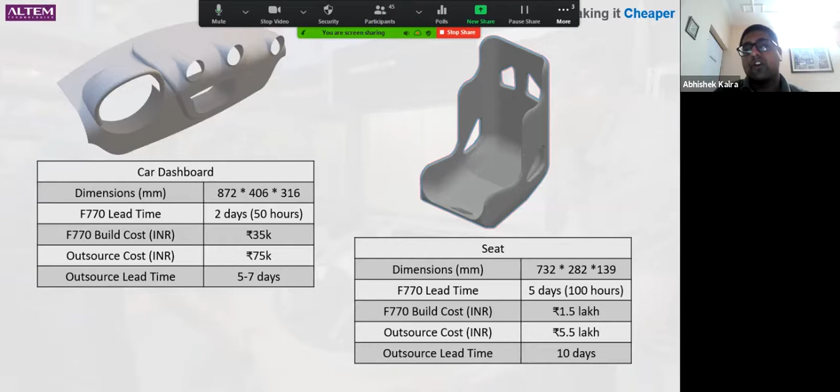So to cut the long story short and to conclude, FDM and F770 is the best fit when you want to save production time and money.

You want to have consistent parts, reduce waste. You want first-time-right parts, yet have the flexibility to fail and have design freedom. You don't want to keep a large inventory. You want to keep improving quality.

Every common problem that I told you about at the start of the presentation, in-house 3D printing, more importantly, is a solution for us. With that, I come to the end of the presentation. I hope it was exciting and informative. We can now open the floor to questions.